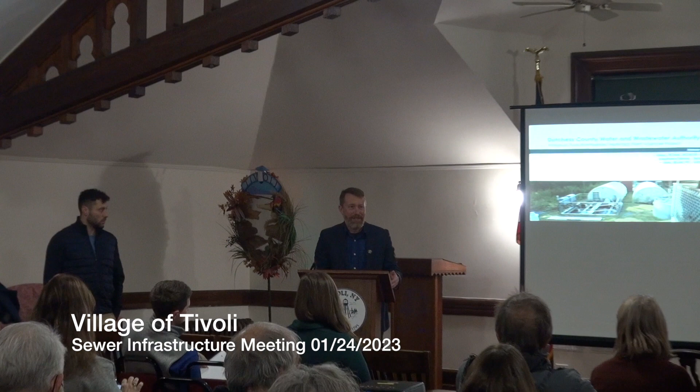And I hope that those of you who are here will help me educate them, since they're not taking this opportunity tonight.

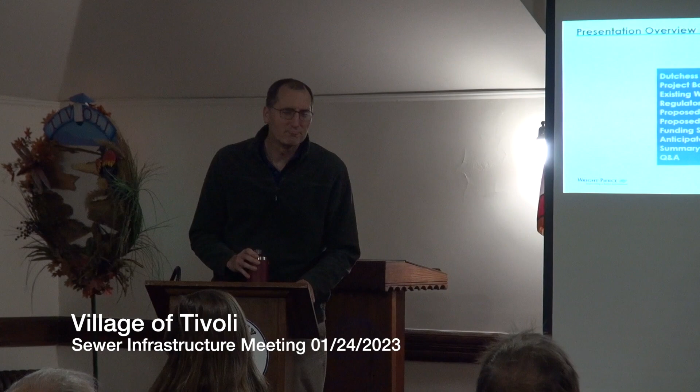I'm the Deputy Director and Senior Project Facilitator for the Dutchess County Water and Wastewater Authority. I'm here to tell you a bit about our organization, walk you through some portions of the project, and I'll be teaming with Kevin to talk to you about different parts here.

Our agenda is up here on the board. I'll give a bit more of a dissertation on what the Dutchess County Water and Wastewater Authority is, and some project background. We will work through the existing conditions of the facility. There are photos and drawings and maps around the room you can look at as you exit, and we'll happily talk to you after the presentation about those. We will review the proposed wastewater treatment technology, the treatment plant upgrades, the proposed capital cost estimate as it stands today, the funding sources, and the anticipated project schedule as we see it at this moment. We'll do a summary and conclusion, and then look to answer your questions.

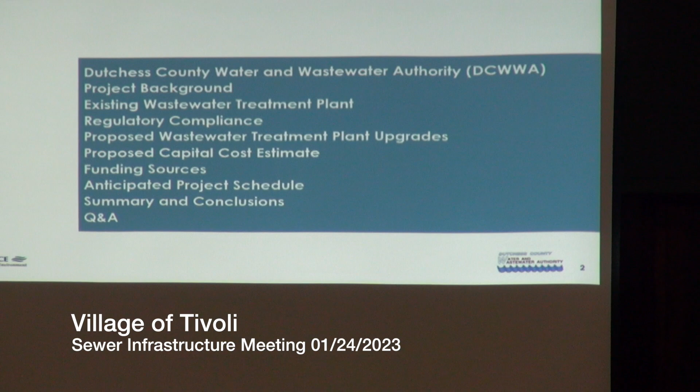So the Dutchess County Water and Wastewater Authority is a public benefit corporation that was created by the state at the request of the county. We started working in about 1992. We own and operate about 30 systems across the county, both water and sewer, and we do end-to-end integration.

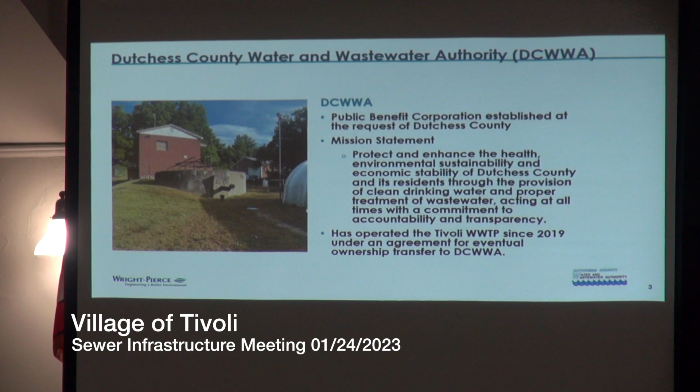We work very closely with the county. We have a board of directors appointed by the county exec and legislature. So we are tied to county government, and we're very responsive to our local communities and partners, and tend to work with any advisory groups that may come along over time to speak to the water and sewer in a particular area. Our mission is solely water and sewer.

We look to make sure that we're treating the materials appropriately, providing clean water, and discharging to the environment in an appropriate manner while being as cost conscious as possible, with accountability and transparency.

The Water Authority, as Joel had mentioned, has been operating your water and sewer systems since 2019 through an agreement with the intent to eventually transfer the system to the Water Authority.

Major systems that we own and operate throughout the county would be the Hyde Park Regional Water System that we acquired in 1999. We've resolved many community issues across the county by interconnecting systems, by coming in and understanding the

liabilities similar to what we have here in the Tivoli sewer system, working with our engineering partners to then come up with a new design and then implement that. Through that process, we try to seek outside funding to buy down the cost of the project and find the best value.

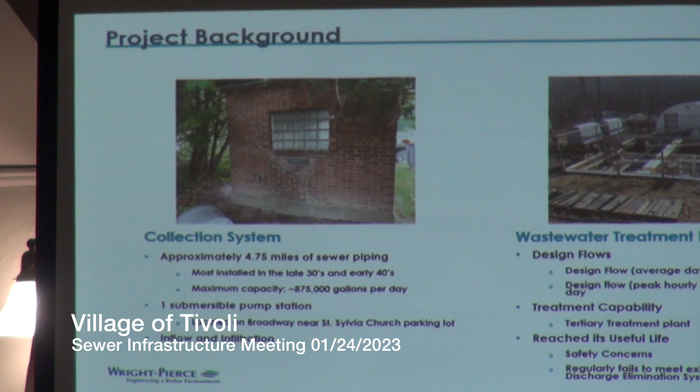So there are actually two phases to the project before us with the sewer system at this point. There's a collection system that encompasses about 4.75 miles of pipe. It's an older clay pipe, some installed back in the 1938 timeframe. It's 8-inch, 10-inch clay pipe, small pieces of pipe, with many potential for water to come in from the ground or from the surface.

And so that's important because the wastewater treatment plant, through the collection system, is receiving a considerable amount of water from the ground and the surface. Over time, we're seeing that increase. There are other reasons why the water would come in, and we're looking to, in this phase, do an evaluation, a design, and then implement an improvement.

I will come back another day and speak to you about this particular component. It's not necessarily what we're here to talk about tonight. Happy to answer questions about it at the end, but I want to stay focused on the wastewater treatment plant. I will also say that the cost of the collection system improvements we're proposing at this time are included in the numbers that we'll show you.

The second phase of the improvement we're here to talk about tonight is your wastewater treatment plant. It is a facility that was built in the 1930s, improved in the 1950s, and had another improvement cycle in the 1990s. It is aging out. All the components of that facility are reaching mechanical, electrical,

automation are all coming to the point where they have systemic failure. The structural integrity of the tanks is such that it's starting to fail. There is quite a bit - if you walk around and look at the photos, you'll see there's a lot of rust, broken components. It's all based on age. And so you have gotten the value out of this facility, and it is time to do the next step.

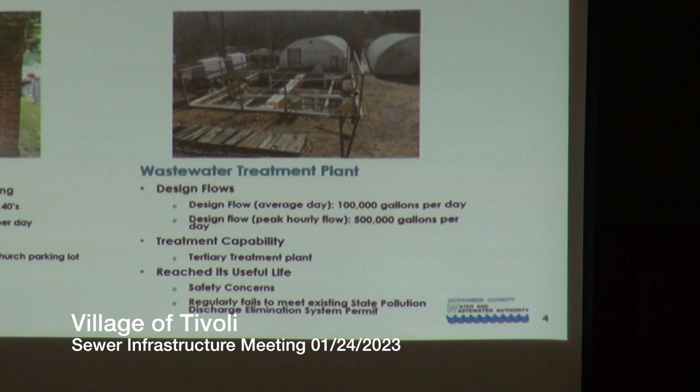So collection systems are my favorite thing, so I will talk a little bit about this just before I go. I've sort of hit on a few of these items. With this clay pipe, and it's throughout, it allows the groundwater in, the stormwater comes in, and you need to address that. And so there are certain technologies that we can implement after we've done an evaluation to line that pipe more efficiently and more cost effectively than coming through and doing a design where we have to dig and then put new pipe in and then restore back in the end.

So our goal would be to use that technology, which we've used on other systems. I actually just completed a project in the Greenfield sewer system down in the town of Hyde Park, where we've seen significant improvement with the amount of water coming into the system that we don't need in there and want to keep in your stormwater system.

Essentially, at this moment, your wastewater treatment plant is designed to treat about 100,000 gallons per day, but we are seeing storm events where we're seeing the water come in and we're approaching 500,000, sometimes 1,000,000 gallons. So 10 times the amount of flow, and that is significant and impacting the wastewater treatment plant. The improvements that we would do to the collection system are a good savings when it comes to having to do improvements elsewhere.

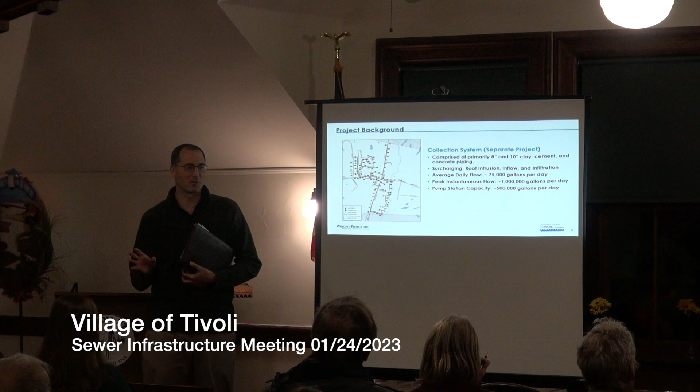And a better way to get rid of your stormwater or your groundwater is through your stormwater system, which is the least expensive way. So again, I'm going to come back another day and we'll get into the details of your collection system. And over the next year and into next year, we'll be doing work in that area. And I'll be communicating to the community through press releases, to our website. I'll come to the community when you want to hear from me, and I'll speak to certain components. We can go into deeper detail about all of this. But again, collection system, now we're here to talk about the wastewater treatment plant. So we go to the next slide.

I'm actually going to hand off to Kevin for a few minutes, and then we're going to team back and forth. Kevin? Thank you. Good evening, everybody. Kevin Hickey, I'm with Wright Pierce Engineers. I'm Senior Project Manager for this project here. And so I'm going to talk about a lot of technical stuff. I know Joel mentioned save your questions. If you don't understand something that I'm talking about technically, feel free to jump in and ask, because there may be a different way I can explain it to you that makes more sense. So please feel free to interrupt me at any time.

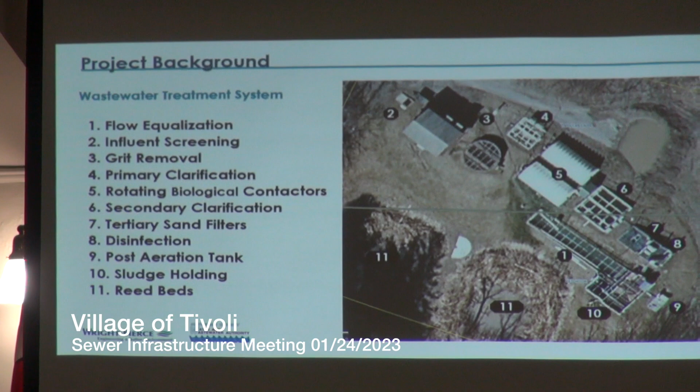So this is your current wastewater treatment facility. There's a number of pictures around here that give more depth than this, but this is an overall picture here. I'm probably going to jump in front of the screen and point some things out so you understand it. So in general, your collection system, like Jonathan says, collects all your wastewater, your shower, your flush toilet, goes down the drain. It enters the treatment plant up here, number 2, influent screening.

So what influent screens are doing is essentially pulling out rags, 2x4s that do come down the sewer, all sorts of crazy stuff. And so the screens are essentially metal grates that capture any real big stuff. That impacts the treatment plant significantly. If that gets through, if pumps break, treatment doesn't happen, right? So all that stuff gets pulled out in the influent screening section of the plant.

You also have an equalization tank, and what that is, Jonathan talked about normal average daily flow, 100,000 gallons a day, you can see a million, right? And so this tank down here, number 1, is supposed to offset if you have big peak flows. Now, that tank is only 46,000, so when you see these huge flows of potentially a million, obviously 46,000 gallons doesn't do a whole lot. So that's why fixing the collection system is so important for the wastewater plant. So that's flow equalization, and that's a little downstream after the screens.

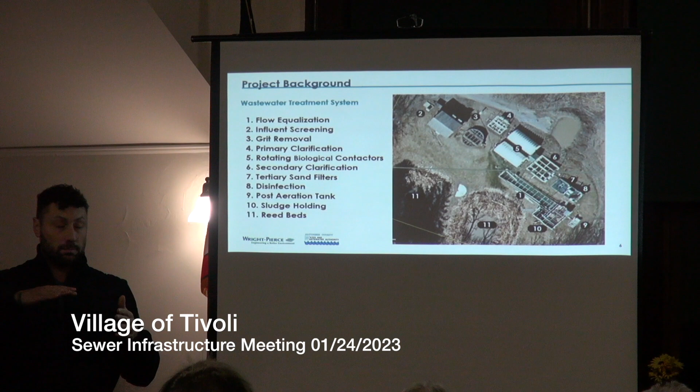And so it's very slow moving through this, and we try to settle out that stuff that didn't settle out maybe in the grit, and it settles out better, slower, and so that's happening in the primary clarification. So the goal there is to remove anywhere between 30 and maybe 40% of your organics through that process.

Those are then pumped to a sludge tank, the stuff on the bottom, which is located down here, number 10. So after primary clarification, which is really a physical process of settling, we go to a biological treatment process, and for your plant that's rotating biological contactors, number 5 here. They're kind of semicircle, and you can see them as you walk around.

This is where we use microorganisms to break down organic matter. It actually eats it, degrades it, uses it as fuel. The way that's done with these types of treatments is there's a wheel, essentially multiple wheels lined up here with a gearbox, and it spins. The bottom half is in the water, and it goes in and out of water. Microorganisms need oxygen, they need food, the same things we do. So they grow as a film on these wheels along this shaft, and they break down the organic matter.

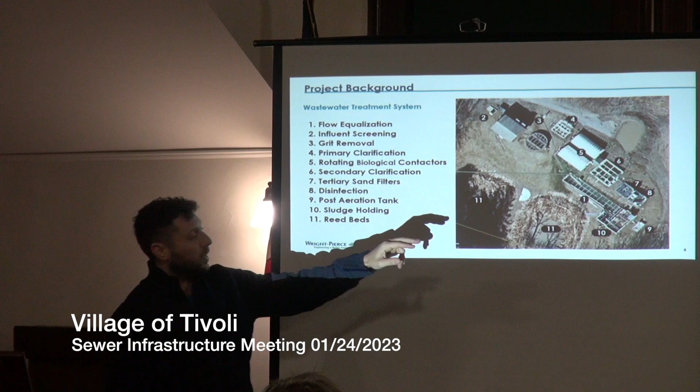Then there's the solid side of it. We talked about the sludge off the primaries. There's also the sludge off the secondary clarifiers, and that gets held in the sludge tank here. That's still very liquid, probably only 2 to 3% solids, so it's like muddy water. We don't want to get rid of a whole bunch of water. It's not cost effective, so we want to dewater it.

And so after it goes from the sludge holding tank, it goes to these reed beds. So these are pretty big. Essentially what they do is the reeds grow up, they use water obviously to grow, they're de-watering it, so then at the end you can take solids off and you can landfill them. They're not 2% solids, they're 30, 40, 50% solids. So you're getting rid of more dirt, kind of ish. So it's cheaper than hauling a whole lot of water.

So that's your existing system. As Jonathan said, it's reached about 30 years, so it's generally the age of a treatment plant, 25-ish years. So we've gotten very good use out of it. It's done what it's needed to do. It's just kind of getting towards the point where it needs to be upgraded and replaced. So I guess before I turn it back over, any kind of questions on the existing system, what it does, how it does it? Yeah, go ahead.

You said with the sludge, the last part of it, that is hauled away? Correct. And where does it go? And what is it like? Typically landfill. Goes to a landfill? Yep, so you pick it up, it's kind of like dirt, more wet dirt, if you will, is kind of the consistency of it, but it's hauled usually typically to landfills.

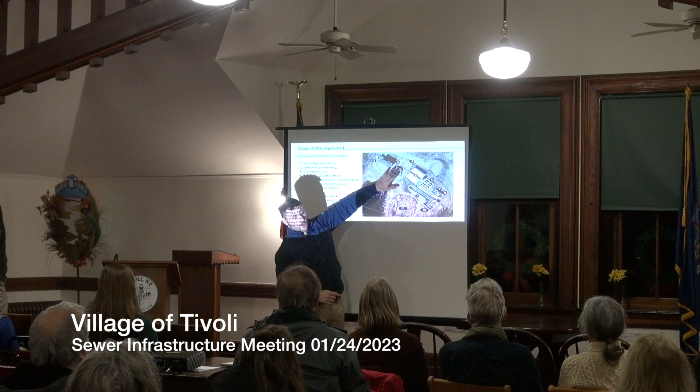Most of these tanks, this is all in the 90s. This old tank, this isn't used anymore. We'll talk about that later actually, because we're gonna reuse it. That's from way back. So it's about 25? You're at 25, 30, almost 35. It's done in 90-ish, so 32, 33 years. Okay, thanks for clarifying. Yep, no problem. Anything else before I get to Jonathan here? Let's keep this slide for a second.

Great. So I just want to go through, and you can afterwards walk through the photos here, we'll gladly talk about them after the meeting. But just looking at this list here of different components, I'm going to give you a little bit of scope as to the condition of the current facility. The flow equalization, that's that long tank here. About 10 to 15 years ago, my understanding is that it floated out. And it is a steel tank. It is holed through in certain spots. Its structural integrity is questionable. If we do any digging around it, it will probably collapse.

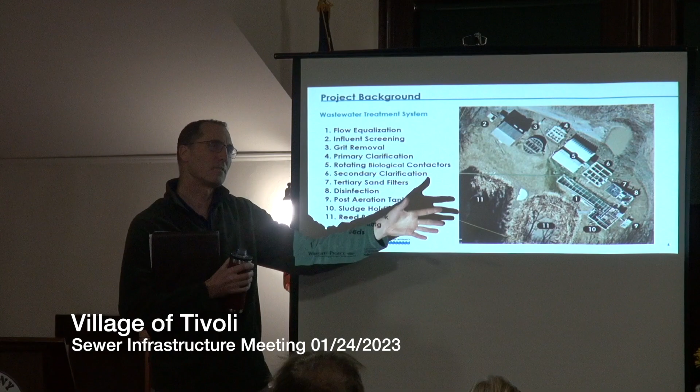The influent screening, the tank is in relatively good condition, but it's undersized for the current facility. The screen has been replaced multiple times, and typically we take grating from an old facility where there's some leftover and we reuse that. A little adaptive reuse. The grit removal system, which is these little bars here that you can just barely see, they are undersized for the flows that we typically receive, especially with the amount of flow from the collection system. So the grit ends up running into the other components. It overflows when we get a major storm event.

Primary clarification is a tank that has structural issues. Oh, and the grit chamber also has structural issues. It's rusted through. The blowers that are on the primary clarifiers are broken. There are no spare parts. There's still one operating. The RBCs, or rotating biological contactors, these are the 2 white things here. They've had multiple repairs through time. There's a long shaft in there and the ends have been cut off and then reattached.

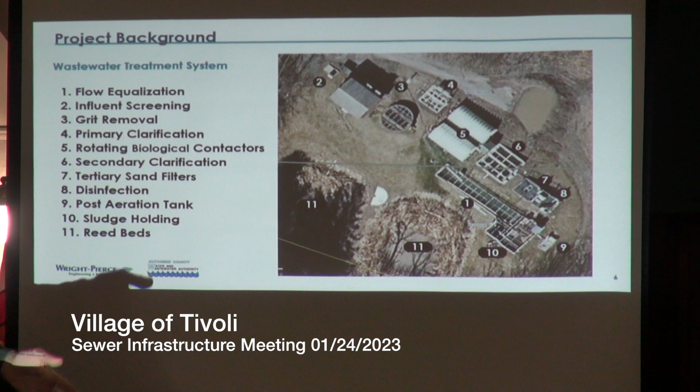The one motor's been replaced. The media is held together with steel structural members, and those on one of the RBCs are starting to fail, and so we get media slop. So you stand next to the machine, it normally should just be this nice hum, but we get slop, and then it comes around again, it slows down, and then it slops, and that leads to early failure, and we would need a whole new RBC there. The bearings are also showing their age again.

Everything here is age-related. Secondary clarifier, very similar to the primary clarifier. It structurally has issues with the steel. We're beyond the typical lifespan for a steel tank. There's no way to really repair that. We've done it with other facilities where we've taken plywood with silicone and carriage bolts and kind of held it together for an extra couple of years while we get through a design and then an implementation.

The blowers that are on the secondary clarifiers are broken. There's one still operating. There are no spare parts. Redundancy is gone. When we get to our tertiary sand filter, it's supposed to be an automated system, so you can keep it in a very small package. The automation has failed, and so we have to operate it by hand.

And the media is original, and the media is basically sand, and it's supposed to have little rough edges to it that make it do its job, so that it keeps things from going through it, and you can slough the sludge off the top. The sand filter quickly clogs, and because we have to manually operate it, it doesn't get to call for when it needs to be managed, so the operator has to be on site more often.

Disinfection: the facility was set up with gas chlorine at one point, which failed. We've removed all those materials that were on site. There was a UV system installed at one point that is aging out and has failed. We're now using liquid chlorine, which is an appropriate technology, but the discharge permit that we'll talk about a little more in a bit requires the chlorine to be removed so that we don't send that out in the environment, because chlorine is not good for fish.

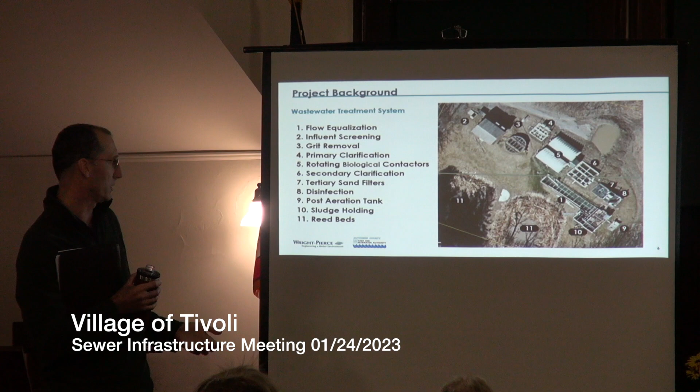The reed beds are a good use of space to dispose of your solids and really thicken it up and make it so that you don't have as many trips to get rid of it. But at some point you have to deal with it. And so there's probably 30 years' worth of sludge that's been drying there, and now we need to build a plant where that is located. And there's not a lot of space in this facility. I just wanted to give a quick understanding of this is the condition. So 30 years of sludge buildup because they didn't remove the sludge?

Well, it's an interesting technology where you use the reeds to actually grow there, and they oxygenate the sludge, and you're able to dewater it. There's actually an underdrain system, so the water will come out, and then we have a pump system to send it back to the system. You send it to headworks and treat that again. So it is an innovative way to reduce the sludge and also treat it. But at some point, the bill comes due, and we are there.

So to say, you've gotten a lot of very good use out of your facility. It's a steel package plant, and it is now time to move on to a new solution. There is no solution here to say we do nothing. We have to do something. And we'll get more into that.

I have a question. Sure. I'm new to this. I apologize. Happy to.

What's the capacity again? How much water is it capable of doing? You said a few 100,000 gallons. 100,000. And you said that you were seeing maybe 500,000? Or a million. Or a million. A day? Or are we saying?

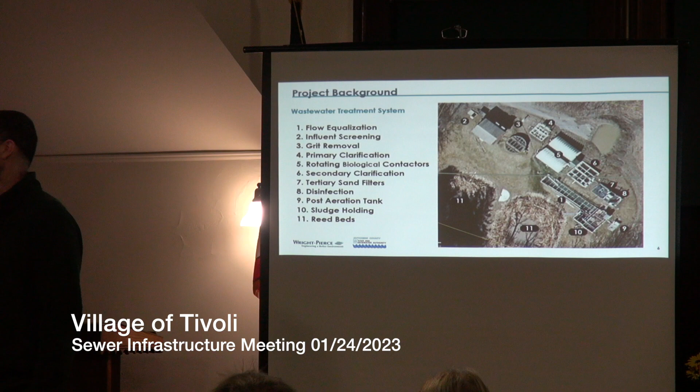I wouldn't say that's normal from a design standpoint, but the DEC dictates to us engineers that we have to use peaking numbers, right? So typically 4-ish. So when you hear 500,000, that sounds like a lot worse than 100, but it's typical for 400,000-ish. So my question is, why are we seeing a million? I mean, you're saying the storm, technically.

Yeah, Kevin's not a part of that project, that's my fault. And I will definitely come back and we can go really deep into that. There's going to be a lot of work in the community, both understanding how we can address that and working in the roads and the rights of ways. Basically, pipes. We need new pipes. That's a good component of that. We all need new pipes. Can you, yeah, I couldn't hear that.

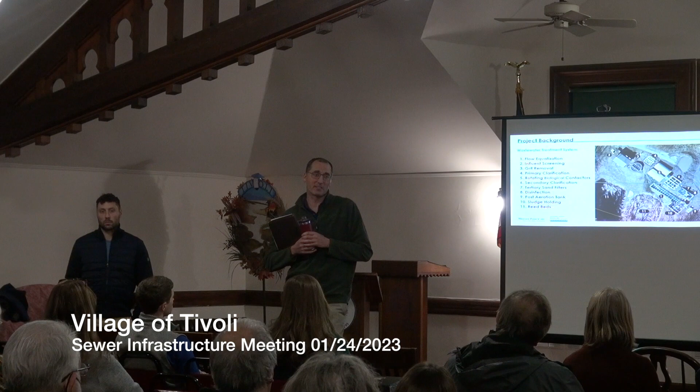Why is it about a million? You said, basically, this lady said. Sure. I said I'm gonna basically just give a little, leaky pipes. Leaky pipes, okay. It's leaky pipes, the pipes get offset, there's root intrusion, they're basically 1930s clay pipes, and over time, they're gonna crack. Yeah, you're right, okay. And I'm gonna come back and talk about that another day, because we have a lot to get through with the wastewater treatment plant.

But there was a talk years ago about separating the storm drains from the regular sewer system, and what happened to that? Sure, they should be separated. And they're not? I thought some of them were. They should be, and I believe they are, but what we're talking about here is not necessarily the separation of the stormwater system, it's the stormwater getting into the sewer.

So water running over the surface percolates into the soil, the pipes in the sewer system are cracked, it gets in. The manholes have holes in them, or they're not well fit, the water goes in. There are other ways that the water can get in also, and again, that's another night. I can go into a lot of detail there, and there's a lot of energy here about that, and I want to come back and talk about it, but we really got to get through the wastewater treatment plant.

So maybe after we could have a quick conversation about it, I can give you a little more detail, but I don't want to steal from the wastewater treatment plant, because this is a big piece we're working on. So, yes, sir.

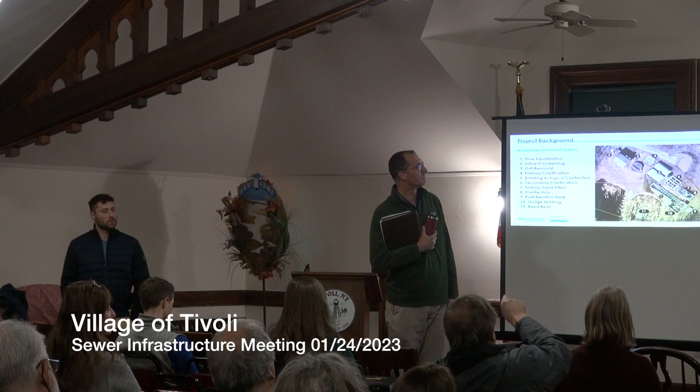So it sounds like the only viable structure is that round thing you talked about. We're going to talk a little bit about adaptive reuse of tanks in this facility, but just to highlight it, we believe we'll be able to reuse the post-aeration tank, the Imhoff tank, which is a circular thing, and the control building, and I believe that's it. Oh, no. Yeah, the rest is steel, and steel is not known for a long life. Concrete is a legacy, and you can use that over and over as long as you've maintained it.

My last project, we were able to reuse just about every tank, except for the steel. And the steel tanks that are here, even if we could reuse them, they're often undersized. So there are better technologies and better ways for arranging all that. And Kevin will go into that in more detail. So if you'll bear with me a little bit longer, let's go to the next slide. Thank you all. Great.

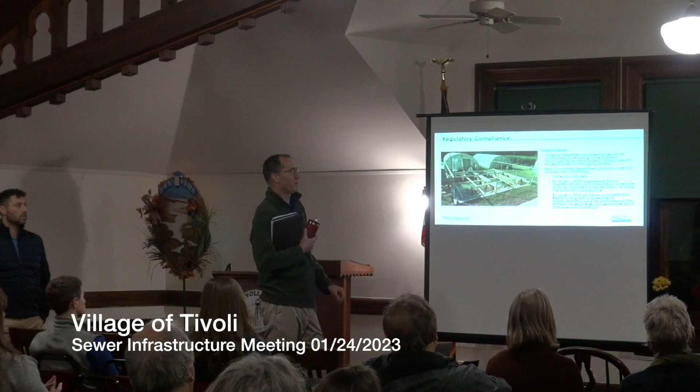So we've talked quite a bit about the systemic failure of the modules. There is a State Pollutant Discharge Elimination System, the SPDES permit, that is put in place. This stems from the U.S. government putting together the Clean Water Act back in the 70s, which created a system where states could define how much pollution could be sent into the environment. And this lists all the different parameters that go to protecting the downstream users. In this case, you have the Tivoli Bays area, any users on the Hudson River, all the drinking water systems, and those that would recreate in the stream as well as the Tivoli Bays and the river.

And so this permit defines how we can discharge, and it goes into how much oxygen demand the water can have, how much solids or tinting can be in there. It goes into the pH. There's a whole set of different components that go into that. And the facility in its current condition is failing on several parameters. This would be the list here.

There's CBOD failures, there's TSS (total suspended solids), average daily flow. We talk about the stormwater coming in and affecting the plant because we get so much in the average over a month. Fecal coliform hits, phosphorus, temperature is over, and then dissolved oxygen.

The facility in its current state, because of its aged condition, is not able to, in these storm events, and mostly on an average day, meet those permit requirements. From that perspective, we are regulated, the village, the operator of the system, which is the Dutchess County Water and Wastewater Authority, to maintain that discharge in compliance with that permit.

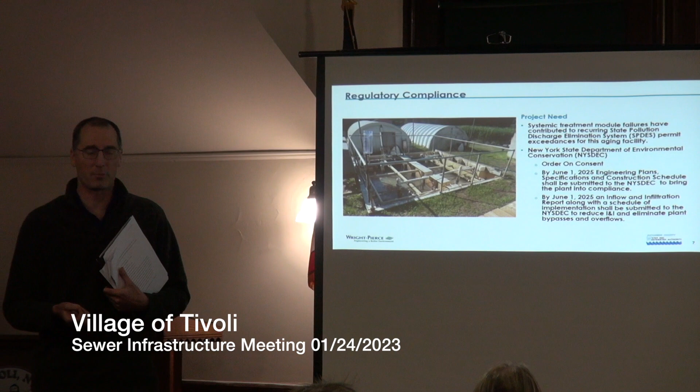It's difficult to work with those flows. But the main component of that is we are doing this two-pronged approach of a collection system that needs to be addressed - I'll come back another day and talk about that - and we have a design for the wastewater treatment plant that we're working on, and we're working to get that to the regulators so that they can review it and approve it.

We've worked with our partners, both the federal and the state level, and we're continuing to do that to seek more funding so that we can make this more affordable and reach that point. So we are at a point where we need to perform and improve both the collection system and the wastewater treatment plant based on this order on consent.

Next slide. What's the time frame on that? Back - June 1st, 2025, we're required to have reports to the DEC explaining how we're going to go forward. We are on the fastest schedule forward at the moment, and we do have a schedule later that we'll talk to. So our goal is to be...

So that's just the report, that's not necessarily... We're ahead of schedule. We're ahead of where they want us to be.

Okay, Jonathan, could I jump in? So the village board has signed that order on consent. We are legally bound. We have been through a lot of hard negotiation by the village board and our excellent attorney. We have gotten those fines to be held in abeyance, and they will be held in abeyance as long as we get this thing done by the right date. If we don't, the fines come.

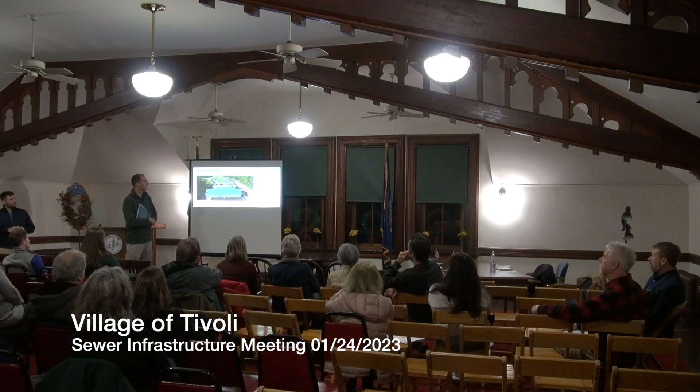Great, actually, I think this is you guys, so I'm gonna step back.

Alrighty, so we talked technically a little bit, we're gonna get even more technical, so please interrupt here. So we talked about the two projects. We are doing a little bit in the collection system here - we are replacing this pump station that you have, and that is also outdated and past its useful life. It does what it needed to do, but also needs to get replaced. So two parts of this are replacing the existing wastewater plant, we talked about, replacing this pump station, which is actually in town, and then the collection, separate project.

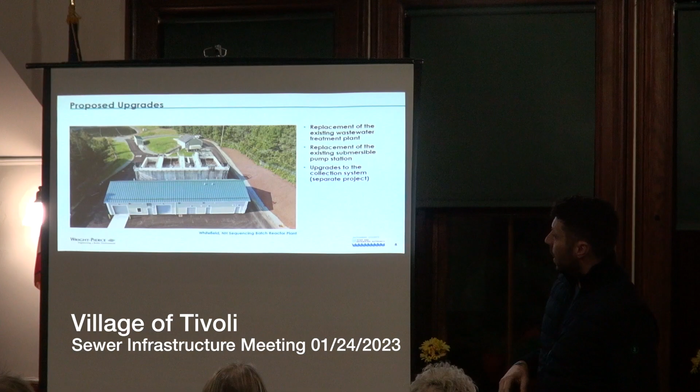The photo here I want to share with you is a project very similar in size to the village of Tivoli that we recently completed in New Hampshire. It's the same technology that I'll talk about that we've selected for the proposed technology - that's those concrete tanks there. We also have a similar building that we've selected for this plant that's similar to this building here. It's a pre-engineered metal building, so it's not stick built or anything. It comes, and so this is a picture of something similar that will be at the site here.

It's a little hard to read here. Impossible.

It's over there as well, so we can talk through this to some extent. It's a little different setup over there.

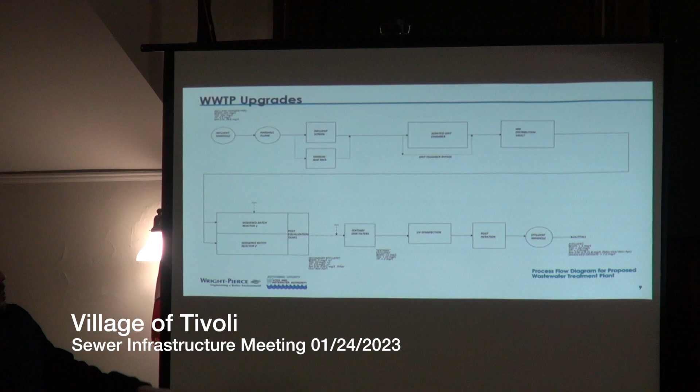This is talking through the process we discussed before, with some differences. For the influent, we have a flow meter measuring how much flow is coming into the plant. We have two screens, though only one currently, and the proposal has two. One is automatic, on a rotating screen that pulls solids out. Then there's a bypass, so if there are high flows, it goes through a separate one. We have a grit chamber again, except this one is aerated, with blowers putting air through it so it separates biological material up while sand, dirt, and gravel settle down.

For treatment selection, instead of RBCs or rotating biological contactors, we have SBRs, which are sequencing batch reactors. We'll talk about what they do and how they're different in a bit. After that, we also have tertiary filtration, so instead of a sand filter, it's a disc filter - I'll show pictures of that. It's a little different but does similar things. We have disinfection again, in this case UV. We'll look at individual pictures of each so it's easier to see. Then post aeration, bringing the dissolved oxygen level up, and then discharge to the stream.

So this is a general process flow, similar to what we talked about, but for the new facility. We'll go through each component here.

This is the screening part. It's a mechanical system, essentially a perforated basket that spins and pulls out the solids up this shaft and dumps it into the container. Right now, the operators are using a rake and scraping the stuff and putting it in a bucket. This mechanical system makes operation much, much easier - better for the operator, better for maintenance, and it pulls out more solids, the bigger stuff.

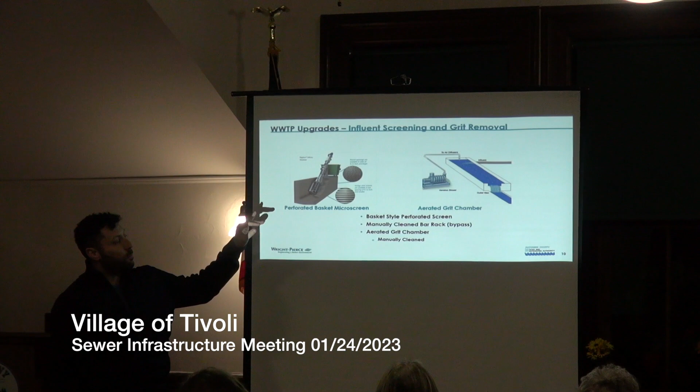After the big screening stuff, we have the aerated grit chamber. It's similar to what you have now, except it's aerated with blowers. You want to float the light stuff up to get it out, and settle the sand and gravel. That will be removed manually, and there will be two of these chambers so we can take one out of service. That's another issue with the current system - it doesn't have much redundancy or means to clean things out because it only has one method to do it. So the grit, dirt, and sand will be moved out manually as needed.

How often does that have to happen? Why manual? Not as often as you'd think - probably every 6 months to a year. It's not something that has to be done constantly, though it depends on the facility. Right now, the way the facility operates, it's a daily task, and Vanessa, one of our operators, gets out there with a shovel and tamps it to get the floaty stuff to go, then tries to scoop up the sand. It's an important part of understanding the system, but with the way the flows currently work, it does blow itself out.

These tanks are all going to be cement as opposed to current? Correct, everything we're talking about here is going to be concrete, which is a more standard approach.

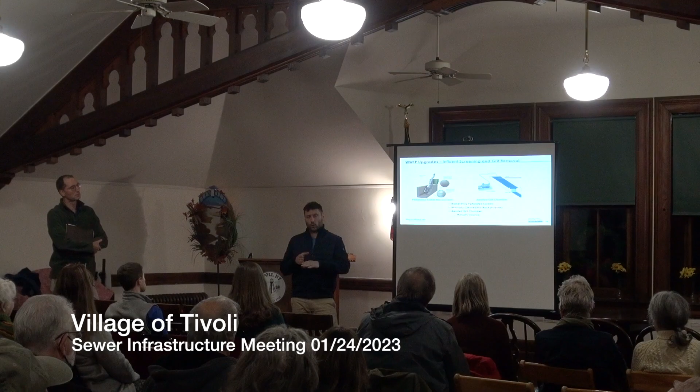Are you designed to the same capacity or are you upgrading capacity? We looked at a range of flows - I don't know if we have a slide on that, but the average daily flow will still be the same, about 100,000. So if you look over 365 days, that's still about the average.

Actually, you operate a little less than that, somewhere around 60 to 80,000 gallons a day typically. So when we look at flow over 3 years, the peak average or peak flow rate we look at is about 500,000 gallons a day. So when we're looking at this, that's the peak. Hydraulically, you do get 1 million gallons. This plant will be able to pass 1 million gallons a day.

The DEC requires you to treat a certain extent of all that. So the disc filters, or the tertiary filters that we're using, don't have to treat that peak. They bypass that, but get disinfected, so we get rid of viruses, bacteria, things of that nature. But DEC, when you have peaks, does not require you to do that tertiary filtration. That's any plant, not just yours. Any plant in the state, you can bypass that at high flows.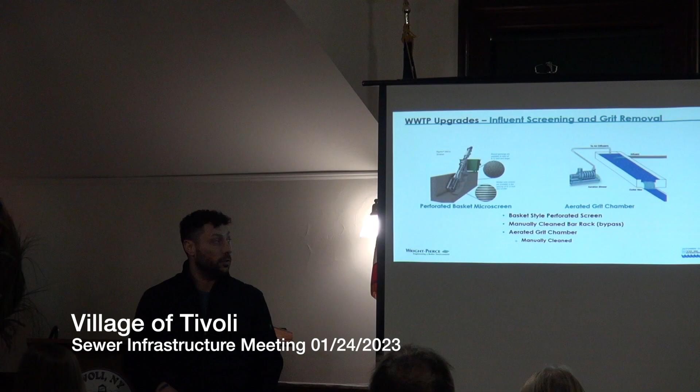So, to your question, 100,000 gallons is the average, up to 500,000 for peak flow that it can treat through the whole system, right? And then after that we bypass it, for short periods. And again, that's any plant. You go up and down the Hudson River, they all do that. You go to Albany, they dump millions of gallons of untreated water into the Hudson River.

So this was the biggest evaluation that we did, and this is your treatment using a biological system. A lot of what we talked about is settling out of solids - that's just using gravity to settle stuff out. The bugs are what really get you down to meet your parts per million.

So these are a number of different options that we looked at for treatment. We look at cost, we look at long-term operation, we talk about ease of operation. This plant is not operated full-time, so we want a system that can be operated so somebody doesn't have to be there 24 hours a day. Obviously that would cost even more from an operation standpoint. These are 5 very standard treatment processes that are used for wastewater treatment across the country.

Obviously you guys have RBCs now - it's worked, it still works. Plants are still designed using RBCs. Membrane bioreactor is a slightly newer process, essentially it uses microorganisms and then a membrane to remove the solids. So what's in here uses biological microorganisms to degrade it and then passes it through a membrane.

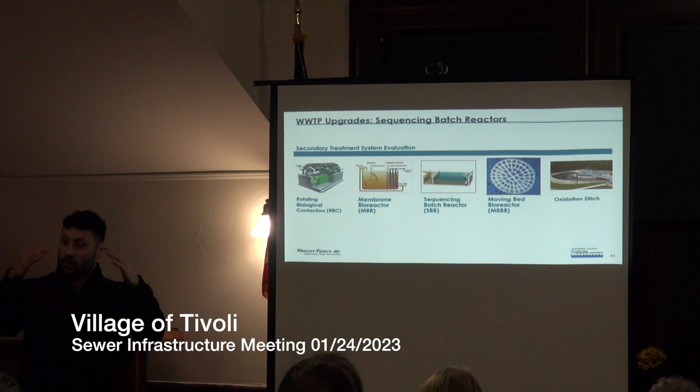Sequencing batch reactor - this is what we designed around. What this does is, again, it's one tank. We talked about primary clarification, secondary clarification, RBCs - that's what you have now. This does everything in one tank. The way it does that is it keeps this brown layer, which is essentially the microorganisms, and adds flow periodically, running different cycles. It does settling, mixes it and does biological treatment, stops the mixing, settles it again, and then we decant off the top and take clean water off the top while keeping the microorganisms to still degrade wastewater. We keep that at the bottom, clean water goes off the top, we refill it again with wastewater as it comes in, and go through continuous cycles. So that's a sequencing batch reactor.

I have a question - how many gallons is that sequence batch reactor, the actual size of the tank? How much water would you say? Oh, less than 20,000 gallons. So there's 2 of them, and they're each 20,000 gallons.

So the typical time frame of each cycle through each of these reactors is 4 to 6 hours, is that right? Something like that. So you have this wastewater that goes in, goes through the different phases over 4 to 6 hours, and then discharges. There's 2 of them that were designed around, so while you're in one phase, say you're settling in one, maybe you're filling in the other, so you're able to balance the flows.

The benefit of these as well is there's 2 different types of SBRs. There's one that really just sticks to the cycles, and then this one we designed around is called a continuous flow SBR. This front tank is actually always getting water in, so it can handle up to 6 times your average daily flow, which is a huge benefit. It's a reduced footprint because it does everything in one tank, so you don't need primary clarification, RBCs, secondary.

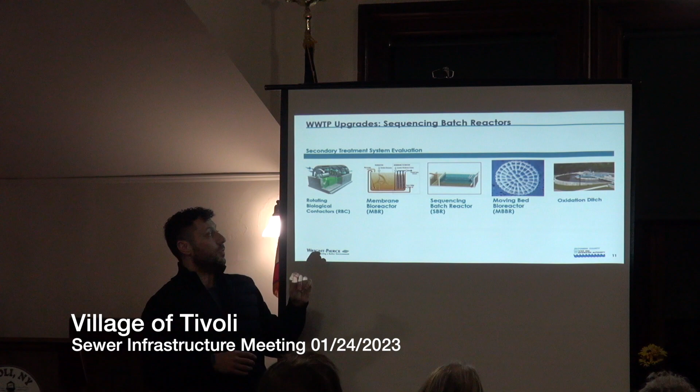The other benefit of the sequencing batch reactors is it gets better treatment from a SPDES permit standpoint than the RBCs. And additionally, we know, based on discussions with DEC, that regulations are changing. They always change. Since 1970, there's always more stringent regulations. The sequencing batch reactor has the ability to change cycles and treat wastewater better. So nitrogen and phosphorus are the 2 biggest things talked about in New York State right now. You've probably all heard of harmful algal blooms in lakes. That's nitrogen and phosphorus. And so you see across the state that the SPDES permits are being modified for lowering nitrogen and phosphorus significantly. And sequencing batch reactors, again, going through their cycles, can treat that.

So when you have a permit change 5 years from now, okay, now we run our cycle 30 minutes this way and 40 minutes this way, and we can treat that nitrogen down the road. You can't do that with rotating biological contactors, unfortunately. Can you just give an idea of the difference in the cost between the one you're suggesting and the one next to it, the membrane? I'm just curious. You said it's less expensive. So what do these things cost? Well, we have a whole slide on that.

Okay. I can give, in round numbers, and this is not this plant, not speaking to the numbers that we're going to talk about today. I'm just saying, if a sequencing batch reactor is $1 million, an RBC was 1.1 or 1.2. They're relatively similar in total cost. But you have ease of operation, better treatment down the road, and it treats better peak flow. RBCs also have a peak flow issue. They're actually cheaper typically per unit, but you need a lot more units of these. But I was comparing it to the one that you said was expensive. Oh, these? So if this is $1 million, these are 3. Okay, that's what I wanted.

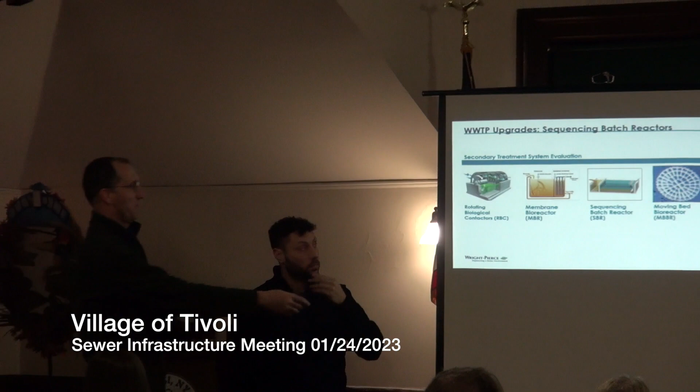So, I would also add, Jeff, the MBR that's here is also a lot of energy. It's a very intensive treatment system. So there's also operating costs that go into the consideration of what we're looking at. And when we look at the nexus point of all the different things that Kevin has described, the SBR at this point appears to be giving us the best value treatment and also considerations for storm events that affect the treatment. So it gives us the best treatment.

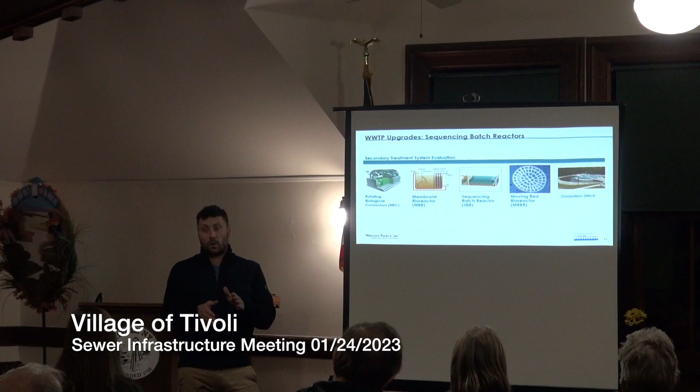And membranes are also difficult to operate to some extent. They need much more, higher maintenance. Yes. If something goes wrong, somebody needs to be there, whereas SBR is literally a timer saying, we're gonna settle for 40 minutes, and then we're gonna mix for 40 minutes, and then we're gonna settle for 40 minutes, so it's a much easier operation. Yeah, I get it. I was just gonna ask, maintenance-wise, what are we looking at? Do they have to be looked at every year?

Are those costs incorporated into the whole project? So we've developed an operating budget for the facility to operate the current facility, and it is very similar to what we need to do with the proposed facility. There are certain changes, there are escalations that are occurring now that are unprecedented, and we will need to add additional funds to the treatment plant for the operating costs of whatever we do here.

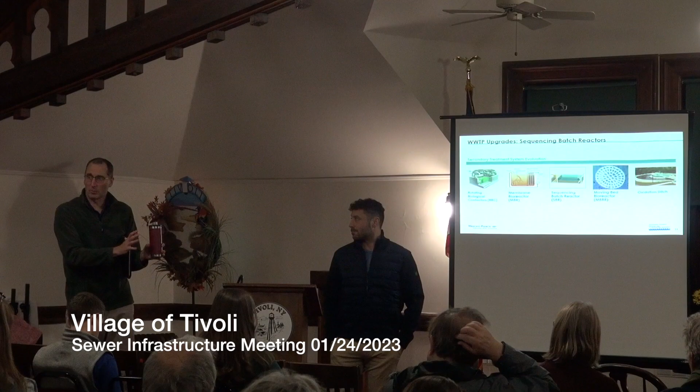But we are building that into our budget this year so that we can complete the construction that will be phased through this process, continue operating the plant, meeting our SPDES permit hopefully during that period. And there'll be additional funds that are added to address that and make sure that we have a fully funded operating system. But I believe we are on the right path, and I will speak to that in some comments. I'm not going to give the operating budget tonight, but I'll show the costs. That's the question. Yep, go ahead.

So you said that this sequencing batch reactor has the ability to change cycles. Yep. How does the RBC and oxidation ditch do that if you had to? You don't? No, they can't. RBCs cannot change cycles. They literally just spin, go into the water, go out of the water. They use that film on the thing, that's all they do. Single pass, right.

Oxidation is the same thing. I mean, oxidation you have a little more control over changing cycles, you can do that because as you go around in the circle, they can mix using oxygen and then not mix using oxygen, but they don't handle peak flow at all. It's very difficult to handle peak flow.

You know, it's a little bit like electric windows on cars. Sometimes you go, yeah, it's broken. So that's my question. How new or how useful is this technology? You're aiming for the middle one. The older ones obviously sound older. So how long have the SBRs been used?

So the process of SBR uses microorganisms, it's mixed with air, and uses those to eat the food essentially. Technically it's an activated sludge process. And that process has been around for 100 years and been used at treatment plants all over, and new plants are still designed that way. An SBR particularly is for small footprint areas to treat using the same process. But the process itself, as far as it uses air to activate the bugs to eat the food, has been used for 100 years.

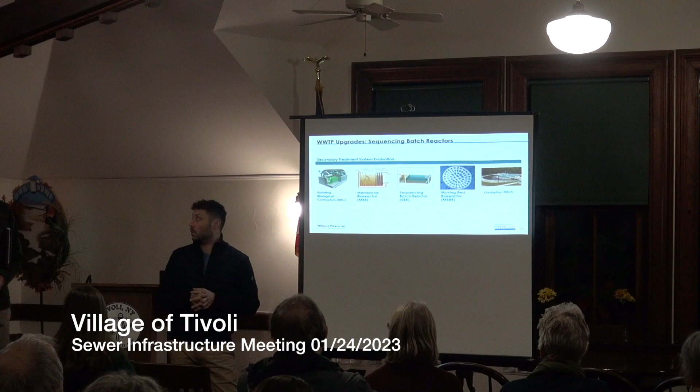If I may speak from the operator's perspective. I'm not an operator, but I work closely with them. When we look at the different technologies that are here, they all require maintenance through time. The sequencing batch reactor uses very simple technologies that are accessible to the operator to manage. There is an air system that sends air into the system and allows the biology to do its thing. The blowers are a standard technology that's been around for a very long time. We are experienced with them, and there's no issue with that.

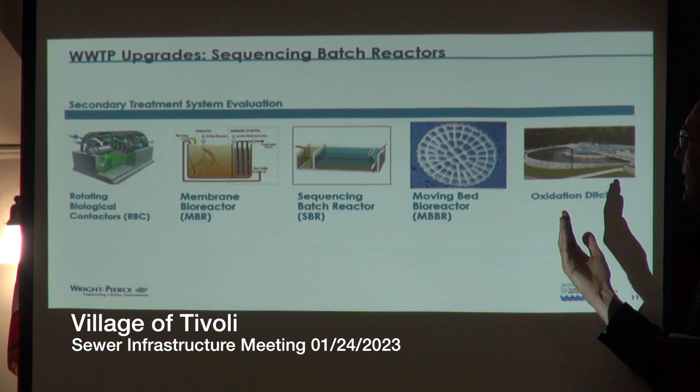There's a decanter bar that moves up and down with the water to send the water out. It is an innovative design in the way it operates, but it is accessible to the operator without reaching their hands into the material. The operators have looked at it, they've operated these before, and we find it to be a very good technology that is accessible, robust, and capable. All the other components upstream and downstream, the operators have looked at, we have used them elsewhere, and we find them to be capable, robust, and good technologies to use. So we are confident in this technology.

And all of these things are dependent on electricity, I assume? Yes. And what kind of a backup situation is there for that? The current wastewater treatment plant and lift station that send the sewage down to the collection system do not have generators. In the past, the facilities were built without them. We propose to include generators that are able to run the facilities in full.

So if there is a power outage, if you remember back in 2003, there was the Northeast blackout, right? We were all there. We will have generators and be able to run this facility and continue to treat the materials. That's a good idea. I believe it's required under Ten States Standards. Have some means, whether you have a generator or a plug to bring a temporary generator in, yeah, it's required.

If you don't have a generator on site, the problem is everybody probably needs a generator on the same day. And if you have shared services agreements or partnerships or contracts to have those generators delivered, you might not actually get the physical generator delivered. So having the generator on site is important to making sure that this is a good technology and works well. If you don't have a generator and can't run it, with any facility, it's going to run onto the ground, which would be a spill. So it's a necessary component and will be included.

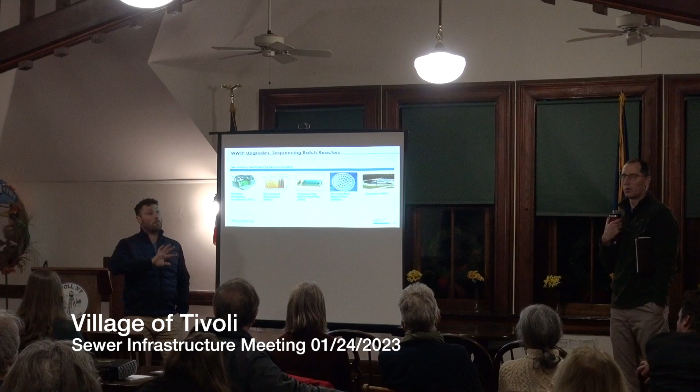I have a question. Yep. The new wastewater treatment plant, what is its life expectancy? It's typically 25 to 30 years, no matter what. The tankage itself, from a concrete standpoint, will last much longer than that. Okay, so structurally. The structures, but like the decanter? Yeah, the decanter is probably going to be replaced in 25 years. Same with the blowers, stuff like that needs to be replaced. The tanks will last.

Many of the components will be stainless steel that are used to convey and move the liquids. But keep in mind that we are trying to use technologies that will have concrete tanks that are a legacy that will carry forward and are very durable. Everyone uses concrete. The components that go around this are items that can be repaired by the operator. If the blower has an issue, we do our own maintenance, we're able to repair that, we're able to get a new one on site. The blower goes to a manifold under the water, which then aerates the water. This is something that we might need to bring in a contractor for because it's a larger job, but these are all things that are doable.

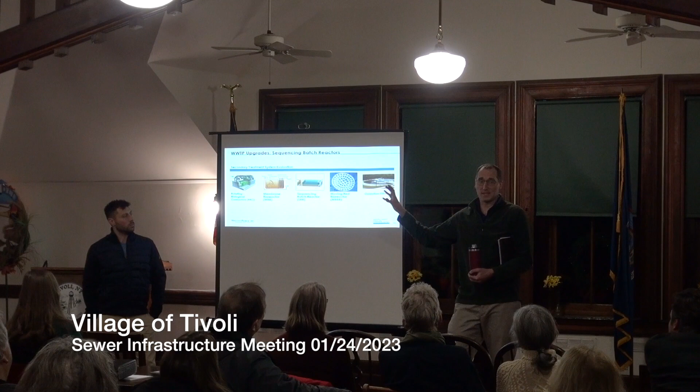And so when you look at the different technologies here, we go to the RBC that we have now. Very large shaft, lots of media, very expensive to do repairs on that. You have to bring in special contractors, if you can find one that will work on a government site, and they're very expensive to maintain when they finally do fail. When we look at the membrane bioreactor, the MBR, it uses cassettes that need to be replaced periodically, and they are very expensive, and you need to have different housings for them. It's all automated. There is no way to really run that manually.

The sequencing batch reactor is, yes, automated, but it is possible to run it in a manual mode. Someone will have to be there when they do that, but we can flip switches and run it manually. The moving bed reactor is somewhat similar. It's again just blowers and then the media that you hope doesn't get flushed out because you have a huge storm event, which it is currently dealing with. And then the oxidation ditch is more simple technology.

But when we look at these, the SBR gives us a robust technology that the operators are able to maintain themselves. And when we look at the long term, the components that are on the outside, we can maintain, we can replace them over time. So it is a good technology that is accessible. And it's the least expensive. Yes.

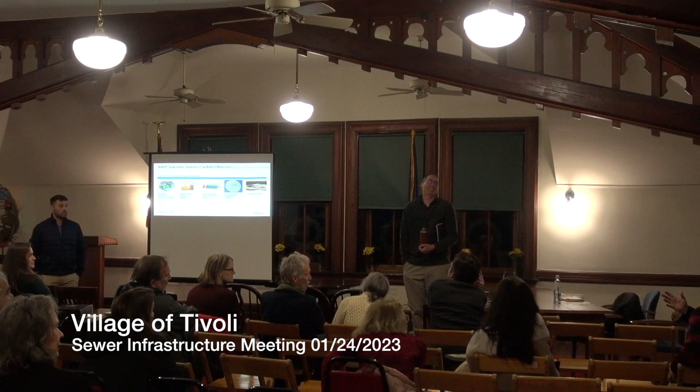I think, if I may, just being mindful of the time, because we're coming up on an hour and a half almost. It's 7:45. So if we can get through the presentation, I mean, the conversation and the questions were fabulous, but maybe we'll get through it. Yep. It's just so people can get everything, and then they can stick around and do more Q&A. We love to talk about wastewater, so anytime you want to talk about the coolers, the sludge, happy to do that.

Continuing, sorry. So tertiary filtration, we talked about, you guys have sand filters now. This is a disc filter, so instead of being filled with sand, it goes through these discs. They capture any of the other solids. Those are backwashed, and those go to a sludge holding tank. So essentially just removing smaller, smaller, and smaller as you go down the line.

So we have disinfection, again, back into the plant. So chlorine is used now. Again, I mentioned it earlier, the issue with chlorine is you have to add another chemical to remove chlorine because the DEC doesn't allow you to discharge chlorine into the river. It's a chemical, it's just not ideal to use.

UV, or ultraviolet light, most plants are going to them now. It doesn't require chemicals. It essentially inactivates any pathogens or viruses by using the light. They're cleaned, they have bars that go across, or they can be pulled out, and they're essentially quartz lights that are 6 feet long, and they're cleaned manually or automatically, in this case manually.

And again, going back to my point, these will be sized to treat 1 million gallons a day. You have to disinfect no matter what. Anything you do before it goes to the stream has to be disinfected. So these are sized to get to 1 million gallons a day.

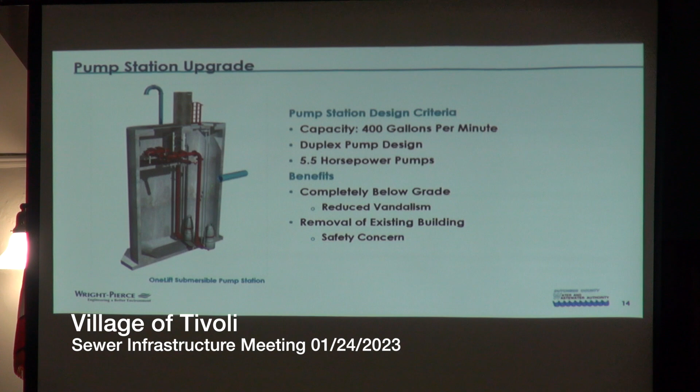This new facility will also incorporate certain protections, so if someone were to find a way to get the right key and open the unit, it has ways of protecting people from falling into the very deep shaft. Right, that's what this red grating goes over, so when the operator opens it, they can't just fall in. It's a catch.

So it's sized essentially the same. Your existing station does handle the flows that it needs to handle. This will be sized very similarly, but it's all below grade. You'll see it, and it's very easy to construct. So that's the pump station that we replaced. And will this have a generator too? This will have a generator as well, yeah.

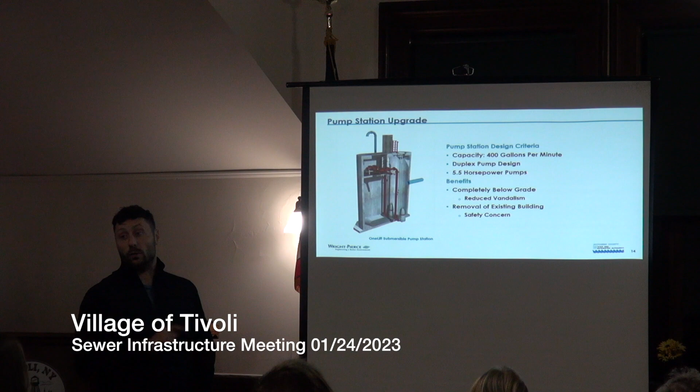So somebody asked, hey, can we reuse anything? The answer is yes, it's limited, but there are things. So if you remember, there was the control building that was kind of sitting here, and then there was a circular concrete tank. That's called an Imhoff tank. It was actually probably one of the oldest treatment technologies. It's a cone that, kind of like the SBR actually, does multiple things in the same tank. It's not currently used, and so that is going to be converted to a sludge holding tank.

And the reason for that is it's up near the road, so when somebody comes to pump off the sludge, they don't have to drive all the way down the back. They can pull up right next to the control building, pump off the sludge, and go on their way. There's very minimal improvements really. Because it's a cone, we have to fill in the bottom of the cone to make it more of a square, and then we're putting in some aeration just to mix it as we need to.

The post aeration tank also, again, while we're going to concrete, the concrete's great there. We're just going to resurface it and then put in a grid at the bottom for air again for post aeration. So reutilizing that tank, and then the control building. The general bones of the building are pretty good. It's just a matter of upgrading some things inside, bringing it to code, and adding a few.

A part we didn't really talk about yet is everything powered here is actually off of 220 volt power for a wastewater plant. That's not good. So 220 is your dishwasher, your stoves, things of that nature. Pumps, blowers typically need something with much more voltage, and so we are changing to 480 volt, which is more typical of a wastewater plant. It actually saves electricity use; even though it uses more voltage, it uses way less amps. So from an energy efficiency standpoint, it's going to be much better for you.

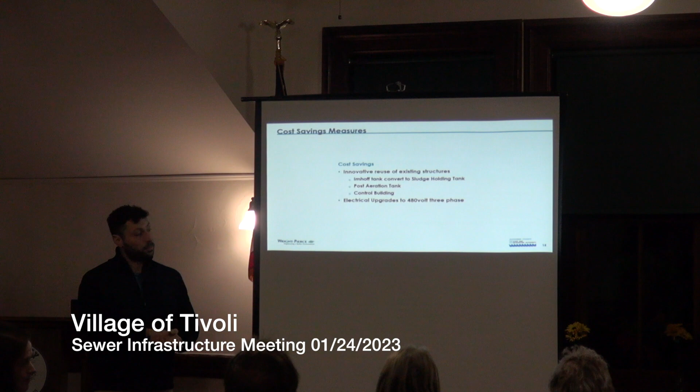So this is the slide you've been waiting for. There we go. So every good presentation comes to this point. So what we've tried to do here, I'm just going to give you a general overview, and then I'm going to walk you through the numbers.

So essentially, we are at a certain point in the project where we've hit 60% for our design for the wastewater treatment plant replacement. That includes the pump station. We're also pushing at the same time the collection system improvement. We're just here to talk about the wastewater treatment plant. The collection system is included in this number. We have a tentative number right now for our total project cost.

We have grants that are applied through, whether they come through Dutchess County or through the Environmental Facilities Corporation in New York State. We have an amount that is the total cost to be financed. We have a borrowing term. We have an annual debt service. We have a typical single-family cost. Single-family would be a dwelling, a house, an apartment. Basically one kitchen, one family.

We then break the cost out per the capital cost. So this is when we build something that is large, say a wastewater treatment plant, sort of like building a house. You get a mortgage, we get a bond, and so there's an annual debt service that goes with that. So like a mortgage payment, we pay it once a year, and we apportion that out to all the property owners in the district through a methodology so that everyone pays their fair share based on the benefit they derive. And we show the cost for water and sewer here.

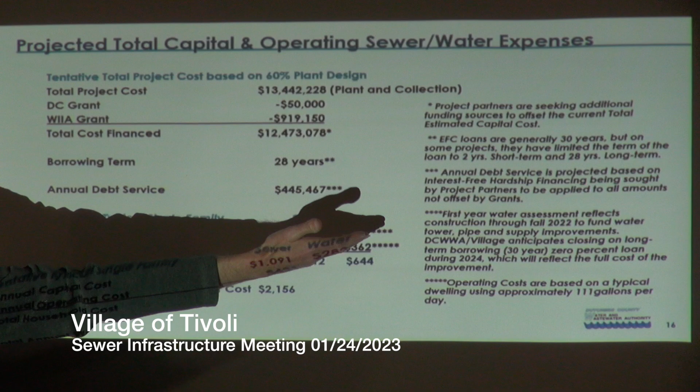And then we have the annual operating costs. So this is sort of like you have a car, you've got to drive it, and you've got gas you've got to put in, you've got oil you've got to change. That's your cost to make that car go. And we again are showing the water and the sewer. We show it then as a total for the household cost, total for sewer, then for water. And then we total it here at the bottom for going forward, based on current numbers, what we're projecting.

We have provisos on the side, which basically just fill you in at different points to help you understand this. We're going to talk a little bit more about this, but we have this total cost that we're going to need to finance after we take out the grants off the top. And the project partners, the village, the water authority, Wright-Pierce, are working to find other funding sources. And we'll go into a bit more detail about that on the next slide.

Two, we have a term with which the borrowing can be bonded, or a mortgage. Typically, there's a credit card or short-term financing that's done for about 2 years while you're doing construction, and you add that to your long-term borrowing, which is 28 years. You get 2 plus 28, which is 30 years. Annual debt service at this point, we're based on hardship financing through the New York State Environmental Facilities Corporation. I believe this is going to be posted online, so we get a really nice.

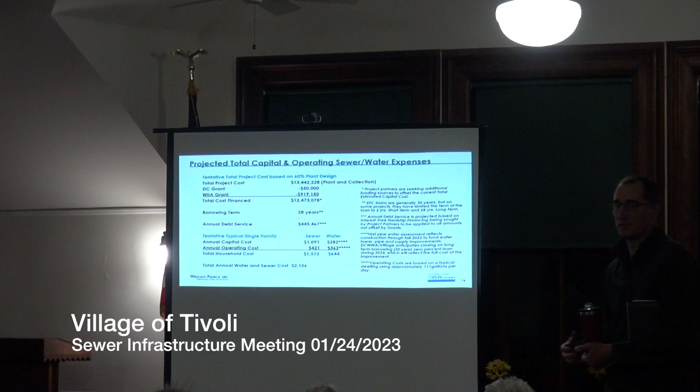So, annual debt service. With the sewer system, the community based on its financing package will look at grant funding. State Environmental Facilities Corporation has hardship financing for a portion of the project at this point. We're looking to have that extended to the entire project because of the changing costs we're seeing in the area.

Then the last two provisos are more about the water, and they speak to this number here for the capital cost of the improvements we did for the tower, the pipes in the ground, the well improvements, the well building. Those we project right now, we're cautiously optimistic that that number you saw in your tax bill this year will stay relatively stable next year.

But we haven't finished the work yet, so there's potential to change. And then finally, there's the operating cost, which is based on 111 gallons per day for a typical single-family home with just one dwelling and one kitchen. So we're giving you the overview, kind of walked you through it.

Quick question: so that total annual water and sewer cost is an estimate based on what we're going to see in our tax bill and what we see in our water bill we get from you, right? Yes. So this annual capital cost that we have listed here, where you've all seen your tax bill at this point, and there's the $282.

Yes, that is your share of the towers, the pipe in the ground, and the improvements to the well site. And is that an annual cost, or is it just for this year? It is annual, for the life of the borrowing.

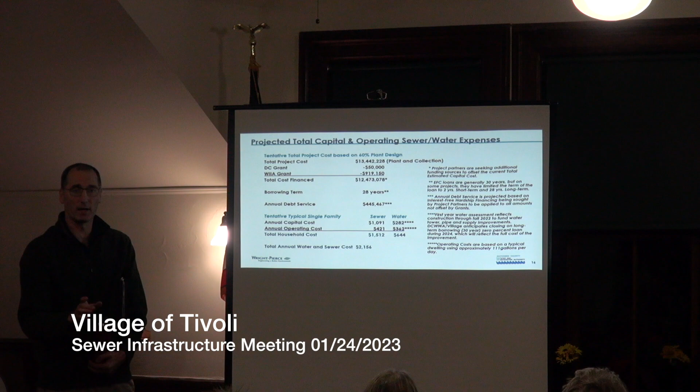At the very beginning, there was a question of like 60% for the water and 20% for the sewer, if I understood. Right, but this number is actually an old number, grant. It's not based on the cost then. So it's not currently 20%.

Is there any chance those percentages... I guess the water system, because we're further along on that process, the total system we've figured out is going to be 4 million something, right? And we go to the state EFC and say, this is how much our project is, please give us a financing package. Their rules are, we'll finance 60% of your project. So that was the 2.8 million we got for the water.

And then the remainder goes into the 30-year borrowing. And the 282 that has shown up on everyone's property assessment, that's us paying back the loan. That's like paying your mortgage, it's a steady price. But my question is, at that time, there was a 20%.

Right, so that 919 was based on what, 5 million? It was based on that. So now we've got a top line of about 12 or 13. Jonathan, could you just read the numbers?

Yeah, I will. Yeah, okay.

The old project numbers are many years old, and we've seen escalation both in CPI, Consumer Price Index, and more recently inflation affecting projects. The nature of what we need to do here at the wastewater treatment plant, and the liabilities involved, are causing escalation. The current project cost has actually changed from when it was originally proposed to EFC when we got the grant listed here. So we're going back to EFC to ask for what they can do, and in the next slide we'll talk about the other funding agencies we're reaching out to and other ways we're trying to economize the project.

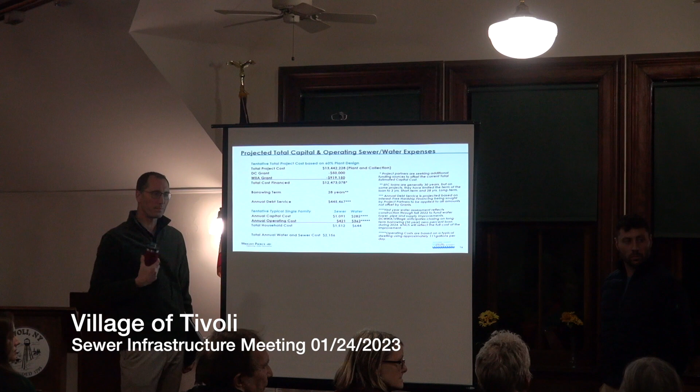So the total project cost is $13.4 million. What we have so far is a $50,000 grant. The county application was for generators. So the generators going with this project, we've got $50,000 to cover the one at the pump station, right? Correct.

And that $919,000, that's our original 2018 grant award. Even back then, the remainder of the project cost is EFC zero interest funding, the hardship funding. So we've got that locked for the smaller version of this project from years ago. And we need to go back to them, that's one of your star points to the right, and say the project now costs this much, so extend our zero interest financing further.

We did submit, we submitted on time and spoke with them. So that request is already in. It already went in on the 17th.

So that leaves us at 12 million for? Yep, when we deduct out all the grants we've secured so far, we're at 12.4 million and change. Then we do the math and end up at these numbers here in the middle, but the key one is that we combine both the water and the sewer for how we'd charge the capital cost and also the operating cost. Multiple times per year you get a regular bill, and all those dollars added up into a single total for each year.

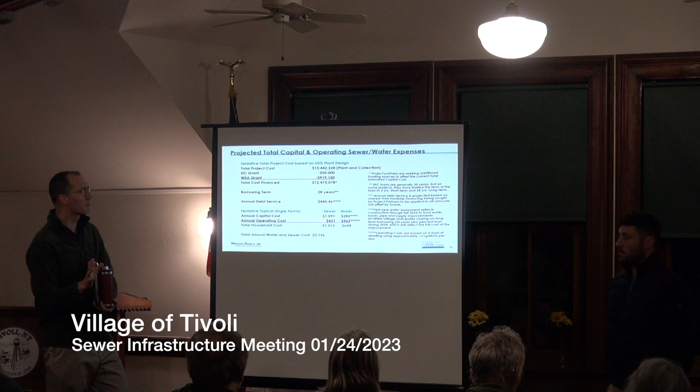That comes to $2,156 for water and sewer, per dwelling. But we're basically already paying the operating cost, isn't that correct? Yes, through the amount we pay every three months. So the new expense at this point is really the capital cost, the infrastructure that's needed to go forward. And the sewer plant operating costs may change some because we will have changes in operation.

The new plant will require sludge to be hauled off-site, so that will come with a little bit more cost. But we are factoring that into the budget now for the operating plant, and we will be on the right track for next year to include that also within CPI.

Question: so the bills that we get now every 2 or 3 months, will they change to monthly? No, they'll remain on the same cycle that you have.

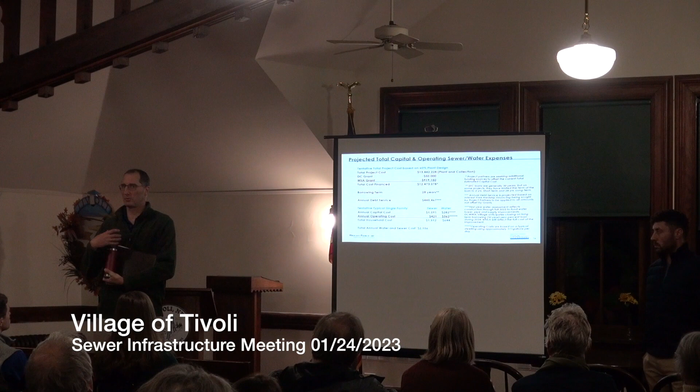So the generators, are they run by propane, or what's going to run the actual generator? Diesel is preferred because it is locally available. And this is all incorporated in these costs? Diesel is preferred because we're able to get it ourselves. We have mutual aid agreements with other entities, and the county has tanks at a central location, so we can hire a truck and they can bring it to us, and we've done that before. Propane is much harder to do that.

But your regular electricity, which is going from 220 to 480, I understand there's a differing cost for the supply and the delivery. We can't change that, Central Hudson is going to deliver it. But who do you have currently supplying the electricity, and are you considering different options in the future? Currently, the facility is served through Central Hudson, and we are buying our electric from Central Hudson.

You would not consider that? We will consider other sources, and we have done it in other communities where it made sense. So if there are opportunities, we'll look at them. It does sometimes add cost, and you have to be mindful of how it fits with what you're looking to do, because this is a larger plant, and that's probably beyond tonight's conversation, but I would say we would consider it.

Thank you. You're welcome. I have a question. So 13.4, it has plant and collection. Is that something that could be split? Like say, for whatever reason, you could only do the plant and not the collection? Or does it have to go hand in hand, one can't happen without the other? We have to do both.

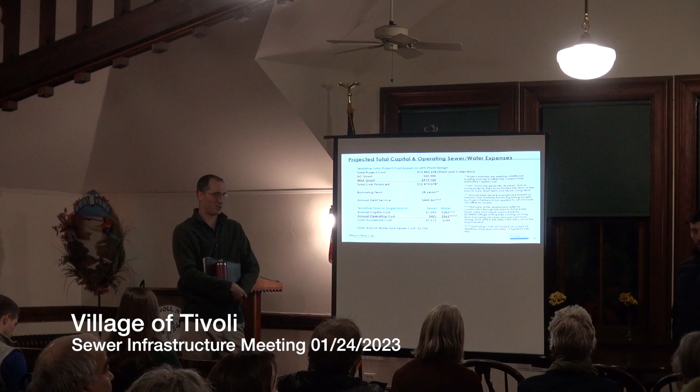And that would happen first? We're doing them in tandem. So the goal here is that by the time we're done with this wastewater treatment plant collection system, we'll also have whatever improvements we can do. Then we'll be able to monitor to see how those have worked out. It's kind of a cat and mouse game, trying to find the inflow and infiltration, address it, and watching for where it's coming from again. The system is always changing, especially with an older system like this.

Sorry, actually this gentleman was... Speaking of sequencing, you're reusing some facilities but changing them considerably. Are you able to do this project without any interruption? The plant will continue to operate through construction, and we will do our best to meet permit.

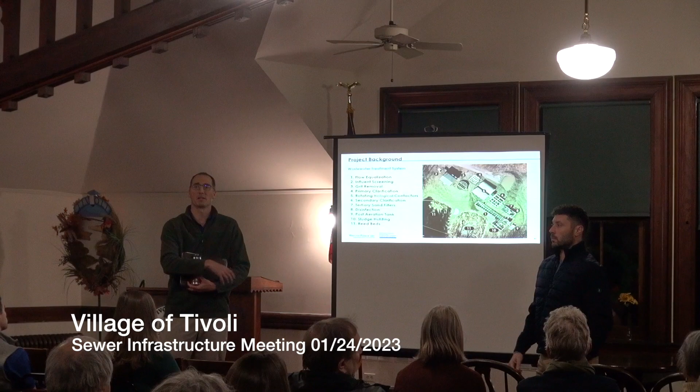Kevin is going to speak to how we're going to do the replacement of the facility to optimize that scenario. So there's going to be really two phases for the project to make sure we get this done. The first part of the project is going to replace the front end of the plant.

So we talked about the headworks. Headworks is the screening and the grit system, and then also the SBRs. And so we're going to utilize all of this space in here. So there is the drawing back over there; you can take a look at it afterwards. But essentially, the two SBR tanks are going to go here and install those. The headworks, so the screening and the grit, is going to come up here. So all that's going to get installed, operational.

And then we can take out the headworks here, the grit here, primary clarification, RBCs, secondary clarifiers. All that can go once we get this stuff installed here. Once that's done, then this all gets demolished. We put a new building here, similar to that one I showed you, where the filters and the UV are going to go. So that gets installed.

And then we can remove filters, chlorine, which is actually in secondary clarifiers, and all of this section goes, as well as, at that point, all of this. Actually, this tank is going to be done probably first because it's for sludge hauling. So right now, sludge is here. That'll be immediately moved to here. So that'll be first. And so it's really a two-phase approach to that.

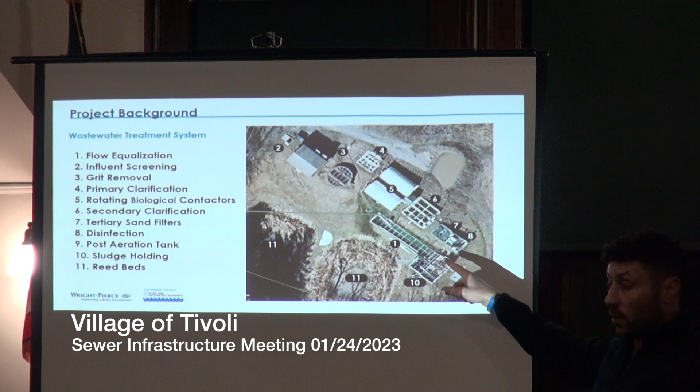The only thing that's going to be slightly different is that post-aeration tank. That's going to be probably the trickiest part of it because we're keeping the tank, right? And so what we'll probably end up doing is some bypass pumping. So we'll pump around it, make sure that we're still meeting the oxygen limits while we do the minor upgrades to this, and then we'll take that temporary bypass pumping off and go back through that tank. But we do have this room here because we're getting rid of the reed beds as part of the project.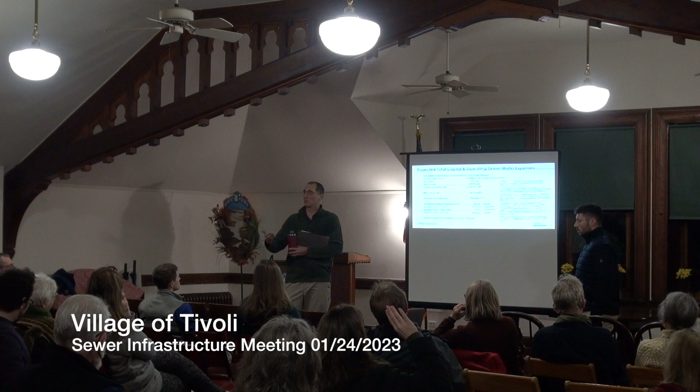When you do a collection system job, you're looking for where your biggest leaks are. You go through and you're looking for them. You're doing flow analysis. You're pushing smoke through the system. You're doing all these different steps, and you're trying to find where the big leakers are. You address those first, and if you've met your number, then you're in a good place. And this may not need to go further. So it includes those preliminary leaks? Yep.

And then the other thing to keep in mind is that we have a lot of legacy pipe here that's clay, 8 and 10 inch, and it needs to be either replaced, or if we can line it, the clay pipe ends up just being the outside edge, and the new fiberglass pipe is a new pipe that'll go for 60, 80, 100 years. So, again, I'm going to come back another night, there's way too much detail to go into. But yes, to answer your question, collection system is included in here at some level, and we hope to do a considerable amount of good.

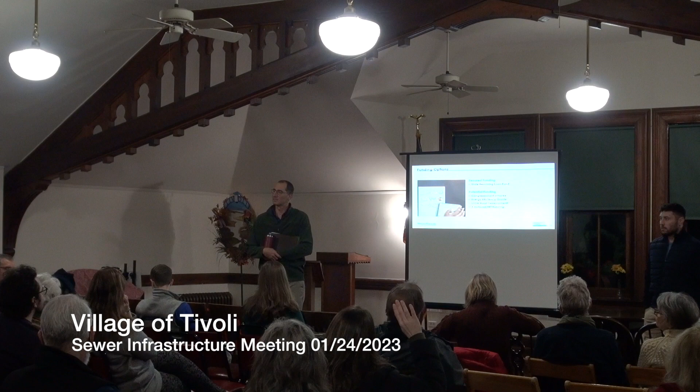When you return, can we bring our... I'll bring a piece of the pipe that I can bring.

Can we talk about individual areas that you may or may not have already looked at? We're going to look at the whole system. So that means all the surrounding areas, like all the homes in the condos or the homes in other areas? The existing collection system will be evaluated for the purposes of where the major leaks are and how we can address them most efficiently. Within that area? Within the collection system. The whole village?

Is that evaluation scheduled at this point? Yep, contracted with Tighe & Bond Engineering. Okay. They've assisted in the past with components, and Lori is the engineer that'll be working on it. We're finalizing the documents and we can get it started, so you'll start to see activity in the spring and the summer. So we'll be seeing these people walking around and we'll be able to talk to them? Yep.

Again, we have to stick to the words. I'll be posting on the website, and I'll come back to talk about that more. I'm happy to do that. Okay, take my card, call me. Okay, great, thank you. John, can I just have a moment for slide 17?

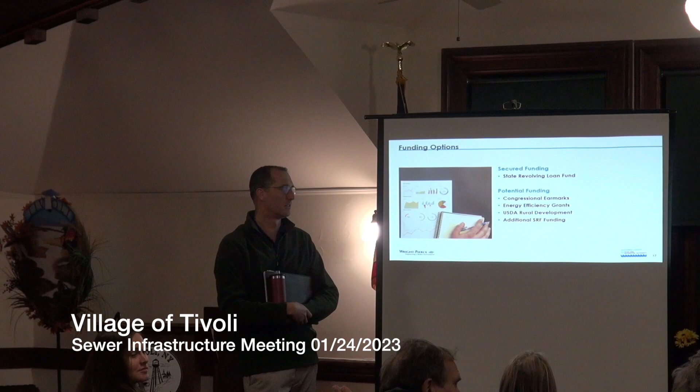Yes, let's go back. I just want to state this in sort of a blunt way so we really get it in case you haven't. I want to be overkill redundant here because this is really the gist of what I as mayor and the board want everyone who uses this system to get. And I have to say how disappointed I am in the people who aren't here tonight. It's hard, so I'm so grateful to you for coming.

We've got a $13.4 million project. We've got about $1 million in grants, so that puts us at 12.4. If we don't find more money, which I'm going to spend as much time as possible going to find, at the 60% snapshot, in the same way that that $281 assessment for our water has shown up on your tax bill, in 2 years or so, the number that shows up next to 281 is going to be 1,090. That's just what I want everyone to understand.

Now, if we can go out and get more funding, that number starts going down. But I just want everyone to not walk out of here not understanding. So you're saying, based on 60%, this is the worst case scenario projection? Yes. And if we find more money, then the cost on your bill will go down? Yes. And just to follow up, if you take $1,000 over, let's just say 30 years, it says 28 years, every household is going to end up paying $30,000 if they're here for that time.

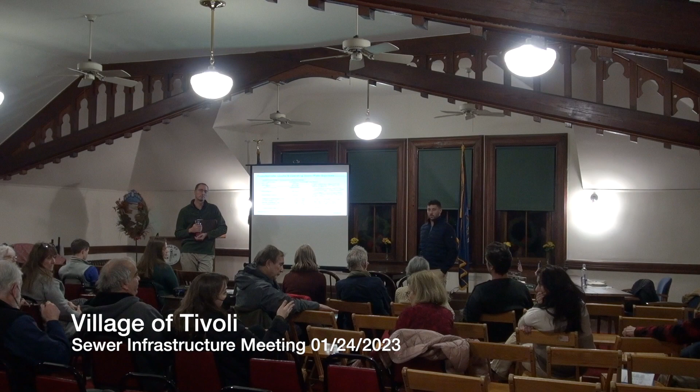You've been waiting a while. This might be more of a question for Joel, but I think it's related with the collection system and the stormwater project. How is one helping the other? We still haven't got information about that, like the cost of that, the cost of this, and then you're saying this is even gonna go up more. No, they're hoping it goes down. No, over the years, that's gonna go up.

Oh. So, we're hoping the capital costs here are fixed, but we won't know until we get to construct this. Right. And there's bidding, and there's 90%, 100%. Right. So this is our best estimate at this point, and these are all tentative numbers, but we have a high level of confidence. Let me just take a minute, 'cause I'm so freaking out.

Stormwater, and this goes to Phyllis's question. My understanding, and I know of at least one personally, is that over the decades since that conversation, the village has been separating stormwater systems from the wastewater system, as should be done. One day there was no catch basin at the end of Washburn Avenue, for example, because that used to go into the sewer system, and then it was gone, which is a good thing. You don't want to treat stormwater; it's different than the stuff in your toilet. It's expensive to do and a waste of resources.

So, as I think most people know, the village, at the same time we're doing this and chasing the firehouse and everything else we do, we are in this drainage and stormwater study, because there's all these cracked old clay pipes, there's inflow and infiltration, there's also sump pumps throughout our clay village with flooding basements, and we know that some of that stuff is going into the collection system for the wastewater treatment plant. It shouldn't be going there.

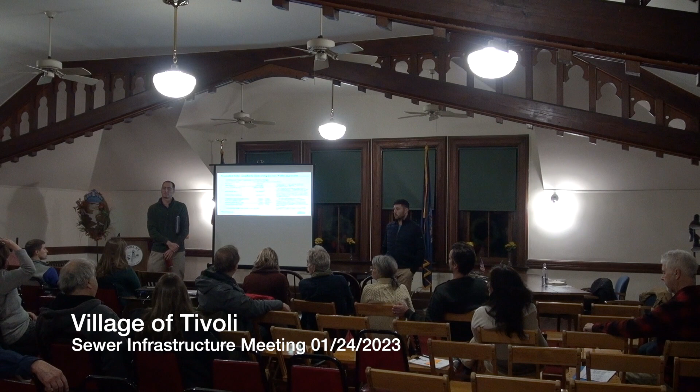I just want to thank the mayor and the board of trustees for the tremendous amount of work that they've put into this project. It's not a reflection of how they.

I just got a question going back to the design and upgrade stuff. I live right across the stream from the plant, so I'm intimately familiar with the noises and the light and the cycle of the year. The breezes? The breezes, yes, the spring breeze. There's always a spring breeze. But could you just speak to what you would anticipate the new equipment being like compared to what's going on now?

So just to give an example of existing conditions, these are in many cases failed or imminently failing blowers that have poor sound attenuation, metal enclosures, and then Kevin can speak to the new technology. Yeah, any of the new blowers, so we talked about blowers for the SBRs, the aerated grit, post aeration, those all come with enclosures with soundproofing. Not 100%, but it brings the decibel level down significantly.

I don't know how far away you are, but what you may be used to hearing is like a dump truck running very loud right next to you, and you can't have a conversation, while with the new technology, we could have this conversation without raising our voices. Right, and that would be in an enclosed space. I've seen these, the Kaeser blowers. I'm sorry. No, you're all good.

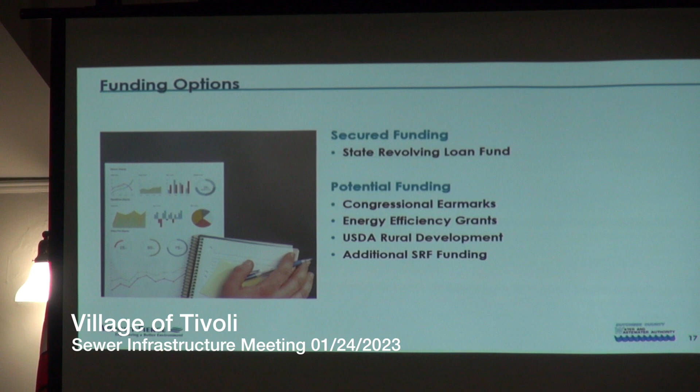Joel has a number of documents that we've prepared from a congressional standpoint. So there's congressional earmarks, which is essentially funding that the House, which is Pat Ryan, and then Senate, so Schumer and Gillibrand, have. And so the board and the mayor will set up meetings based on the documents that we provide to go and request additional funds, similar to the firehouse that you guys are doing right now. So that's one mechanism for funding. Yeah, we've begun asking for a meeting. We've been in touch already with Congressman Ryan's people, also Schumer, Gillibrand. So that's going to the politicians to get some money.

You may not know, but what is the average that they would give? I want them to give 13.4. Yeah, just 13.4, go for more. Well, no, I don't mean to be flip, it's just that it's horrifying, this number. Yeah. It's a shitty number for a little place like that. I don't know, Tina, how much they give. Obviously, we'd be competing with every other thing in their districts.

As I've been saying to lots of people, the village of Tivoli didn't put this in in 1938. The federal government was the prime mover. And here we are again, with the expectation that a tiny community with a tax base like we have keeps up with everything we're supposed to and need to keep up with. So we have a very strong case. I've got letters saying, you're not meeting your permit, you're going to get fined, and I get to take those to these people and say, I'm trying to do my job, please help do your job. Bring the money down.

To his point exactly, consent order sounds bad in general, right? You're in a negotiation with the DEC. It is the single biggest helping hand you have in all of this, by far. They're usually very easy to work with when you do this consent order, to make sure you're not getting fines, because they know you can't afford that. The number one criteria on any of these things is are you under consent, are you missing permit, all this stuff. So it sounds bad, but it's a huge help from a funding perspective.

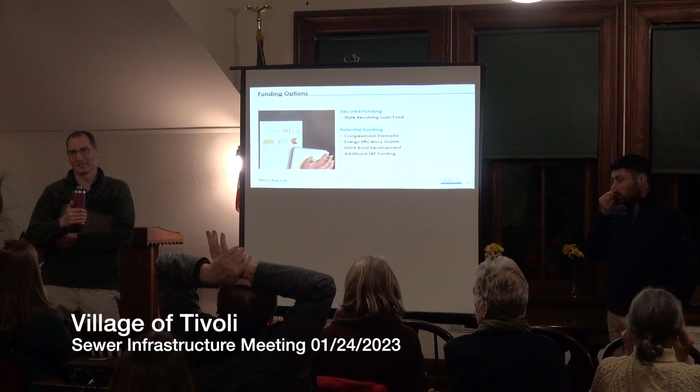But at 60%, there should not be any big surprises like that. Correct, we've done the field work, we know things, unless, like Jonathan said, the DEC comes in and says, no, you have to do this. And that's out of our control, but we know the site now, because we've done the field work. So we are looking at the worst case scenario for money, and we're actively working with the regulators to understand any permit changes that might occur with the implementation of Dynamo. So we are having those conversations to understand that.

I don't expect to live that long, but when you say it's got a life of 25 to 30 years, what happens then? I do have a sense of responsibility for the people who come after us. So there's obviously been... would you have to redo the whole thing again in 30 years, and what do you foresee there?

No, these are all concrete tanks. There's no reuse whatsoever. Concrete's gonna last you, those tanks are put in for 60 years, so they'll last a real long time. The concrete is a huge factor in this cost. Once this is all in, you're just replacing that decanter mechanism that removes the water, or replacing a pump. The structure itself stays.

In 30 years, you don't need an entirely new plant. Exactly, at that point, especially with good ongoing operation and maintenance over those 30 years. Part of what happened to our village is, the last 30 years, things weren't getting done that needed to get done. Even though we did our best, we're a little village with part-time folks. And that's how we got here.

So hopefully going forward, I think even on the water system, this is one of the reasons most folks in the community thought transferring to the water authority is the way to go, because that's all these people do. They're not a for-profit corporation, they're a public benefit corporation. They're not in this to make money, they're in this because the state created them to take on troubled water and sewer systems. They will maintain and operate it better than we were able to going forward. So hopefully in 30 years, we won't be having this meeting again.

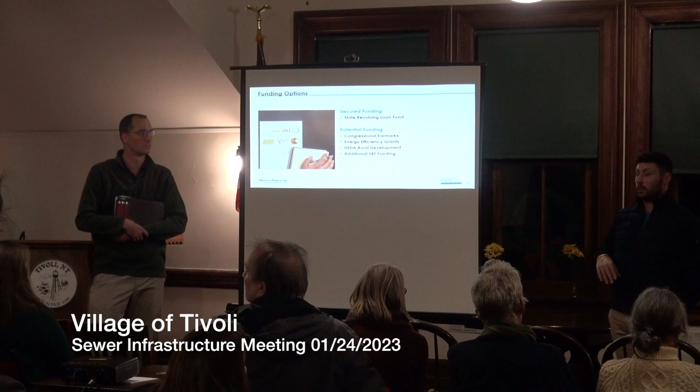And when you look at the grading plans, most of the components are out. Yeah. Just before we end, I have cards over there if anybody has questions technically - if you say, hey, I didn't understand this, they're over on that table, so feel free to shoot me an email.

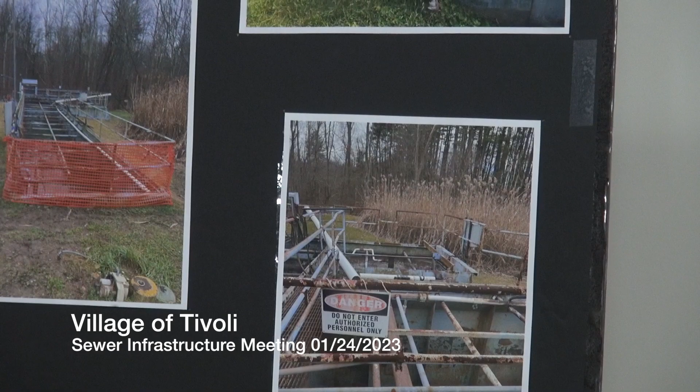So that's there now, there's a transformer. Power. Probably not gonna have this here, it's replaced with transformers, but it's gonna be somewhere. It has to be close to the road, that's the central access point, but it's more likely to be inside the fence. Up to 45. So it's a decent size facility.